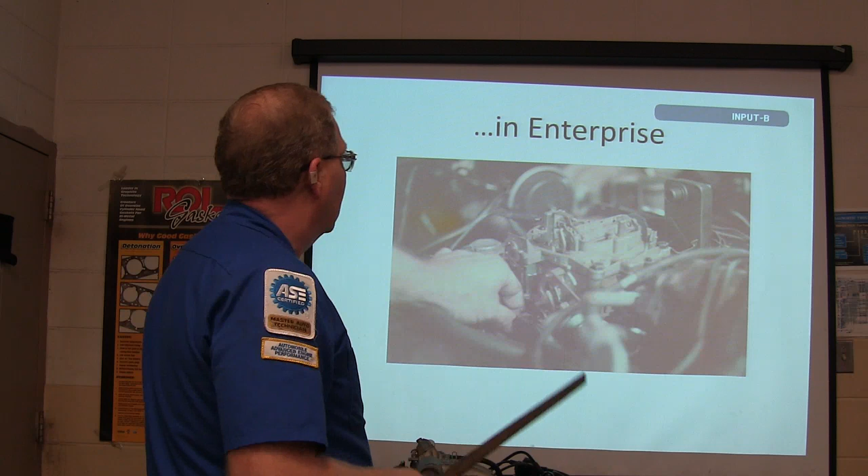In Enterprise, I went to work at a shop over there when I came back off of harvest and everything. Well, actually, when I came back off harvest, I went to college for a little while, and I was working at a gas station part-time. Gas was about 40 cents a gallon back then.

And this was working in Enterprise on carburetors and all that kind of stuff. What kind of car is that? Looks like a Chevy. How do you know? I know what a Chevy looks like. I understand that, but how do you know? How can you tell that's a Chevy by looking at it?

That's a Quadrajet carburetor. That's what I was trying to get somebody to say. What did you just say? What is that right there? Quadrajet. What is that? This picture was taken in 1977, by the way. That's a crankcase breather, right?

All right, now, did a lot of wrenching in independent shops, fleet maintenance. Fleet maintenance is pretty darn cool. That's kind of what you're doing right now, is fleet maintenance. If you maintain the equipment and keep it checked out and keep it serviced, then you don't have a whole lot of regular repair work to do. Not usually. Occasionally you have to fix something. But the better you are at keeping this fleet maintained where it'll stay smooth, then it's basically you're just oiling the machinery. And that's a good job to have, and it's also valuable to the person you work for.

I did that down in Texas. I went to school with Volkswagen in Jacksonville and Mazda in Jacksonville. Lincoln Mercury, I went to school there with them. International Harvester, I went to school with International Harvester. For a little while I worked with the International Harvester dealer. And Ford, Jeep, Chrysler, and that kind of thing. I've been to all those schools, and I don't know how many hours of factory training I've got, but I got quite a bit. Now, what got me was I'd been working on cars 6 years before I ever went to my first school.

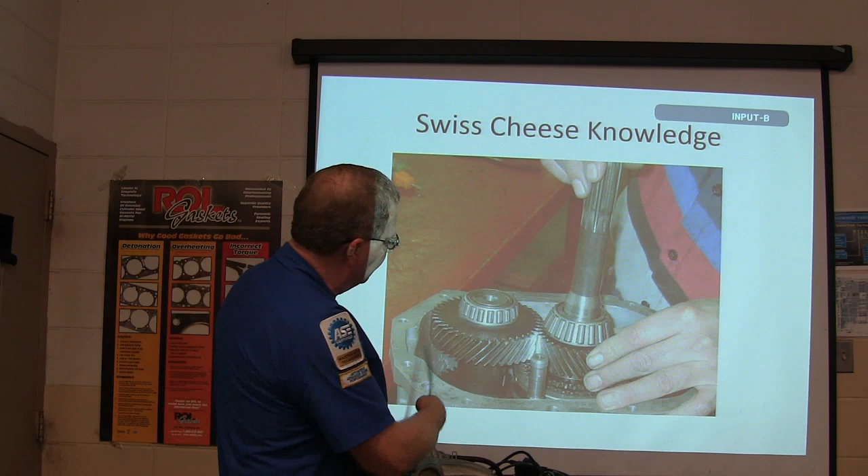But I could rebuild all manual transmissions, and I did it. But if you ask me how manual transmissions work, I couldn't tell you. I just knew I could take that thing apart, put it back together like a puzzle, and I could drive away on it. But if somebody says, well, exactly how does the power flow work? I didn't have a clue. I never saw a wiring schematic for 6 years.

Really. But I went to school with General Motors in 1981, down in Houston, a 2-day class, because we had a Delco parts supplier when I was at Sabine. I went down there. It's the first factory school I ever went to. And then after that, I went to a whole bunch more. But when I went to the Volkswagen place in 1983, I saw my first wiring schematic, and I thought, man, if I know how something's wired up, now I can fix it. I ain't going to have to guess all the way through. I've been guessing all that time. Didn't know there was a good thing like a wiring schematic I could use.

Worked in Dothan at the Ford place. Now, this wire harness here, this is my buddy Donnie. I took a picture of him. That wire harness was no longer available for that Aerostar, so he had to rip the dash out of it and cut the harness apart and fix it wire by wire. Of course, they were willing to pay him however much time it took.

That looks kind of aggravating and complicated, but when he got it all back together, it was like brand new.

This right here was me working over at the Ford place. The reason there's video of me here was because they actually had news reporters doing this, and I was training these young boys even back then.

One day a lady called me at the Ford place and said, I'm working with the TV station, and I need somebody to talk to me about oxides of nitrogen. I said, okay, what do you mean? She said she'd called all over Dothan and couldn't get anybody to talk to her about oxides of nitrogen for a news article. So I said, if you'll come over here and bring your camera crew, I'll talk to you about oxides of nitrogen. And so I did.

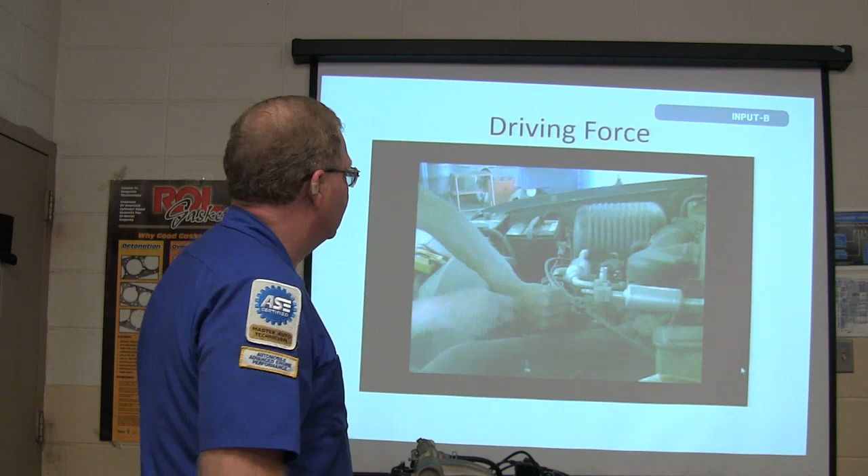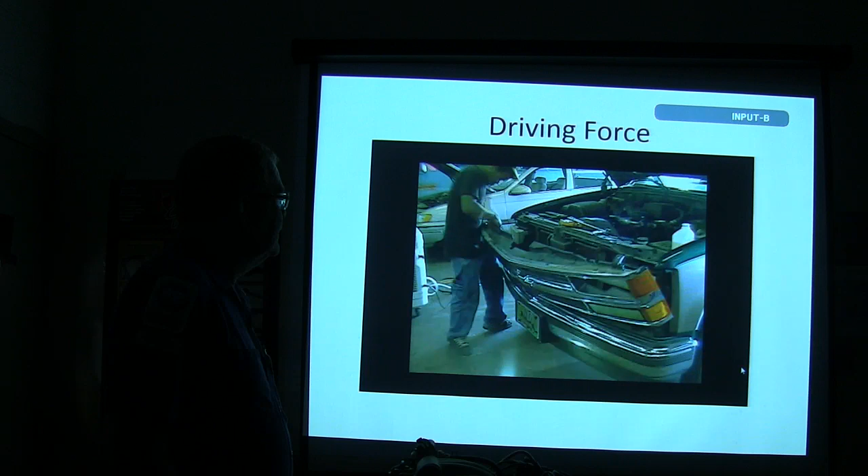I made this little video, so it's part of a recruiting video here. I like making videos.

Oh, when you do that, it's not fair. Why? You just saw it.

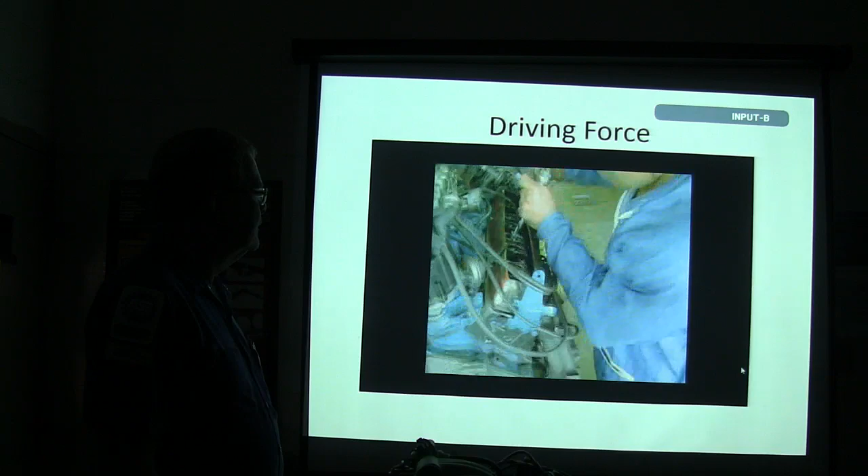She won gold at the state competition and competed at nationals and all that. She came in here not knowing anything about cars. She was a little blonde-haired, blue-eyed girl, and she just said, well, I wanted to be challenged. She hadn't even taken steering and suspension or brakes yet.

I said, get those brake trainer stands over there and work on them until you're sick of them, then work on them some more, and then I'll show you a few things about alignment. She went up there and put a whooping on everybody, because they had a vehicle jacked up with stands under it with exactly the brakes she had practiced on, and she was only one of 40 people who could put those things back together after taking them apart. It was amazing, everything just fell into place.

She could actually get her alignment angles right because she was kind of like Noah, you know how much horse sense he has and how logical he thinks. She had that kind of thought process about her. That's the motor age stuff - you guys know I've been around motor age for a long time.

This right here, this was one of the things I noticed. Everybody knew in the community where I grew up that I worked on cars. So whenever people know you know how to fix cars, they want you to work on theirs for free, because you love them, or because you love doing the work.

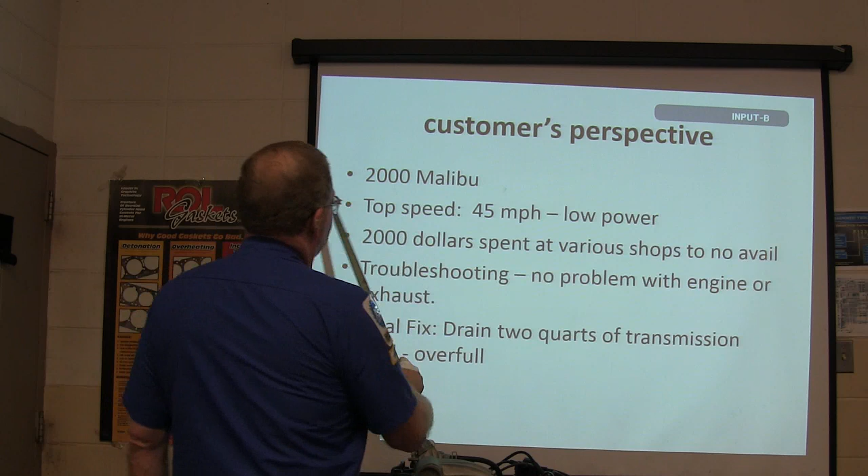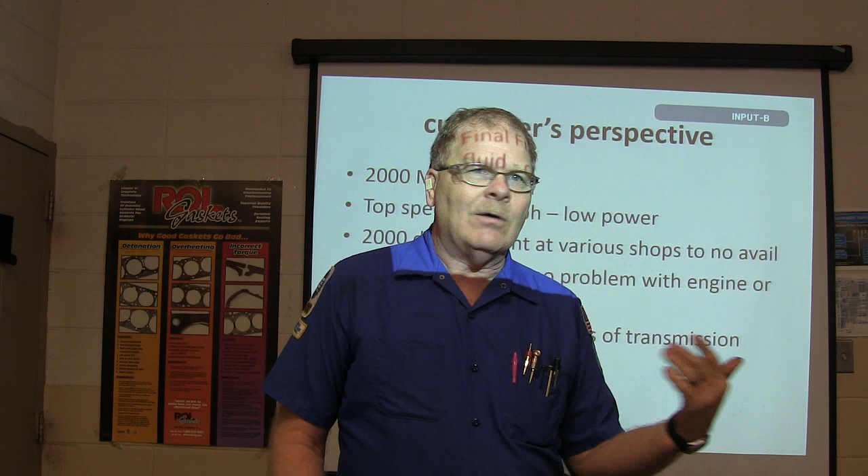2000 Malibu, top speed 45 miles an hour, low power, $2,000 spent at various shops to no avail. Troubleshooting found no problem with engine or exhaust. Final fix: drain 2 quarts of transmission fluid. That's all that was wrong with it. That particular transmission, if it's overfull of transmission fluid, chokes the car down where it won't hardly go. Usually if you overfill one, it pukes it out the vent and goes all over the place, but on that one they don't do that - I don't know why. When we drained the fluid out to where it was supposed to be... on that one there's just a little cap on top so you pour it in. A lot of people feel like too much is better than not enough, so they just dump a bunch of fluid in there, and if you get too much in, it won't hardly go.

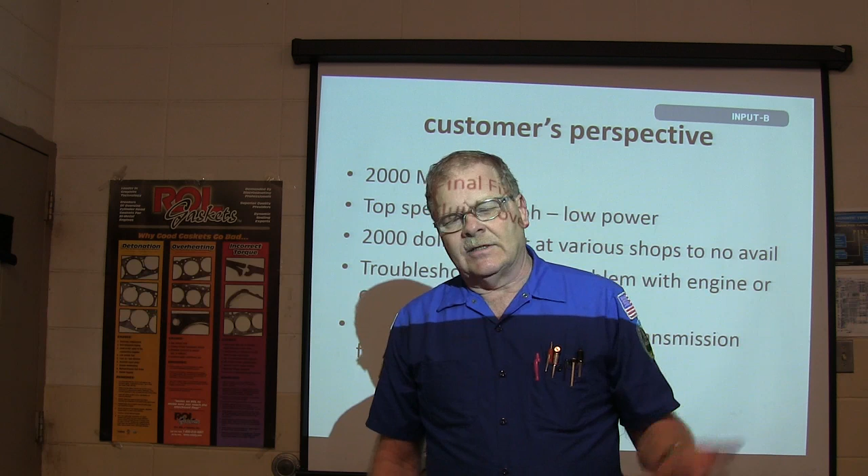My son Matt had a little car with one of those transmissions in it. He called me and said, Dad, I took my car to have the oil changed quick on the way to work, and after I got it back it wouldn't hardly go. So I told him, jack it up in your shop, or put your stands under it, and with the engine running and the transmission warm, pull this little plug out so a bunch of fluid runs out. He put a pan under it, about 2 quarts of fluid ran out. Put it back together - perfect, ran like a brand new car.

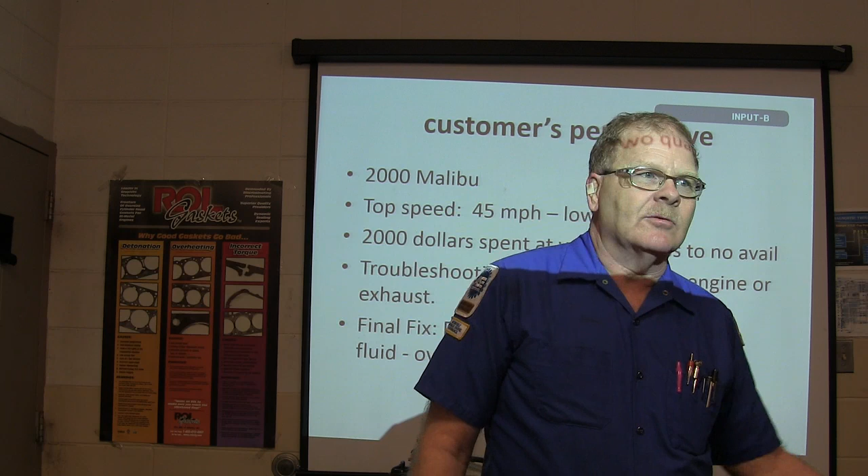So he went back and said, why did y'all pour transmission fluid in here when all you're supposed to be doing is changing the oil? They said, well, we felt like you might need some, you know. But they didn't know how to do it. Anyway, that's what the deal was on that.

Think about that - $2,000, you'll never get that money back, because everybody assumed it was a catalytic converter, or a mass airflow sensor, or low fuel pressure, something like that. I'll tell you this - we checked all that stuff, didn't find anything, stumbled across the transmission fluid problem by accident because I was teaching transmissions, and I said, hey, they need to know how to check the transmission fluid in this car. That's when all that fluid came out of there. I said, I wonder if this thing's going to run better now. And it ran like a spotted eight.

And then she paid a $5 basic charge.

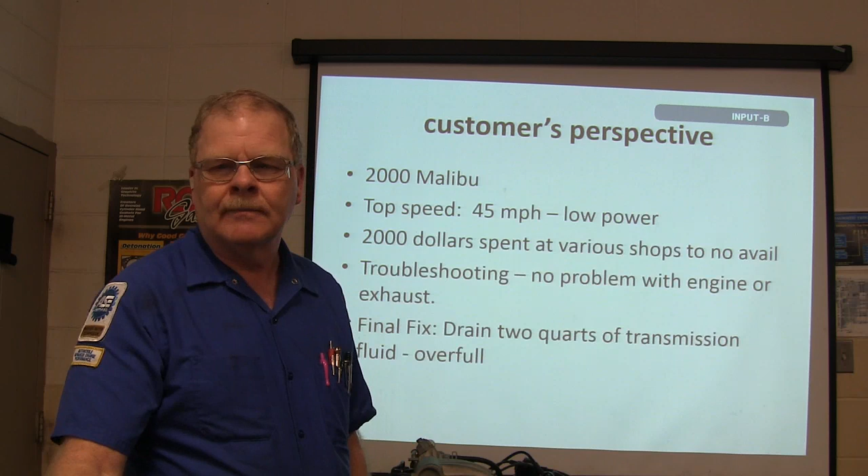It never knew you were spinning it over because that fuse had been pulled out and put in a different place. You're spinning the thing over, and it's just putting a little dab of fuel in it. It would if it was idling, but that wasn't enough to start it because you need to wet the manifold to start one. It's like when you pat the gas on with a carburetor, right? Same deal, it's going to flush the fuel in there.

I thought about this for a couple of days. I said, well, it ran just fine after it finally started, but it was really hard to start. This guy said if you spray carburetor spray in there, it'd fire up and run just fine. But all we had to do, whenever I did the wiring schematic, I looked at the fuse there and found out there was no fuse there. It wasn't like it was blown, there was just no power going to pin 20, I think it was. I plugged the fuse in there, fired right up, and good to go.

A lot of the times you'll see these shops charge somebody $400 or $500 for seeing four spark plugs in a four-cylinder. I don't know what in the world is going on there. On the Mercedes you worked on, they wanted $1,100 to put those mounts on there. I didn't get paid anything. I know, you can suck it up.

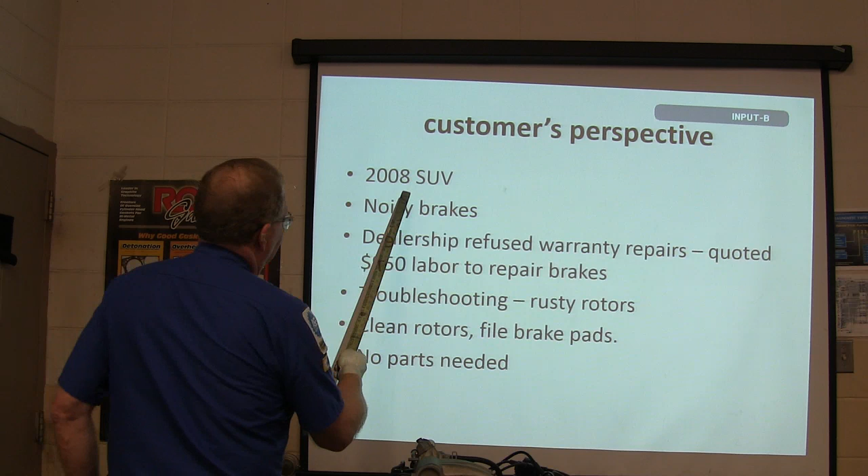All right, 2008 SUV, this was a Honda. Noisy brakes. Dealership refused warranty repairs, quoted $950 labor to repair the brakes. This was under warranty, but they said, you've been riding your brakes, you've messed them all up, we're going to rebuild all your brakes, we're going to charge you $950.

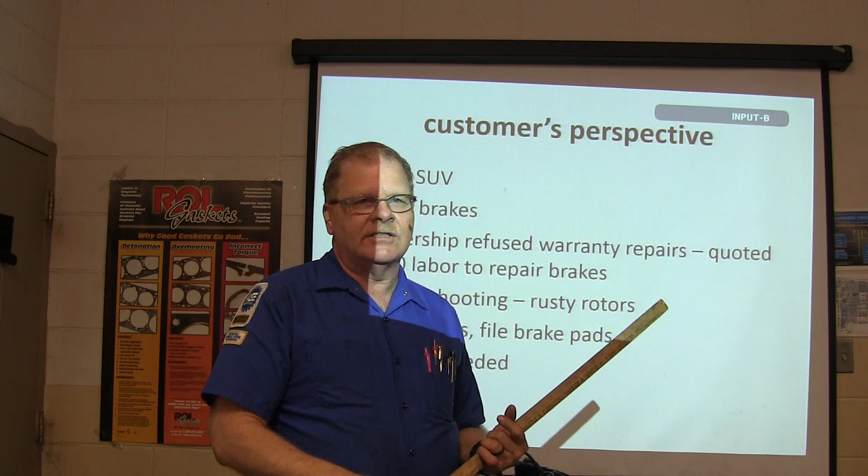His daughter happened to be in this program at the time, so she brought the vehicle over here. Rusty rotors - one of his daughters had been overseas for a while because she was in the Navy, and the vehicle was just sitting there until the rotors got rusty. And you know when you drive on rusty rotors, that goes away. That's how my little Honda was on that one side, I just ride with it and clean it out with the brakes, keep on going. Cleaned the rotors, filed brake pads, no parts needed.

I mean, the brakes weren't worn out, they had plenty of pads. The rotors didn't even need to be machined.

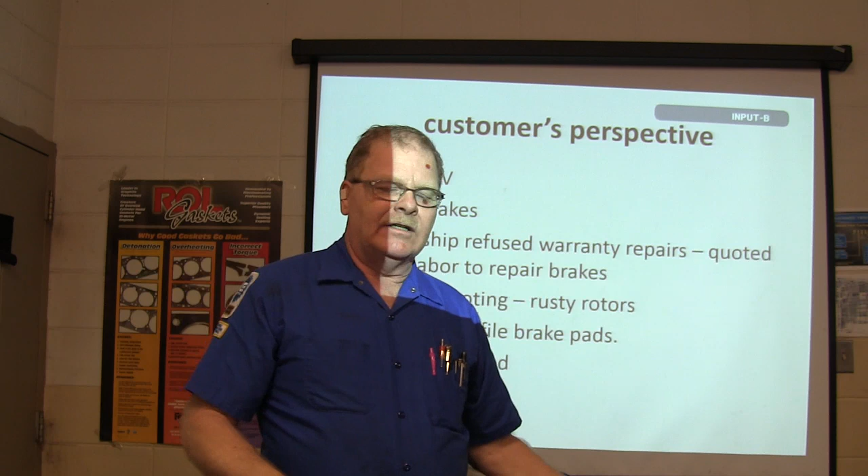One time when I was at the Mazda place, this woman had run through a puddle, apparently, brand new Mazda GLC, this was in '83 I guess. She had stopped the car and parked it and left it there a while, and it had been there with that water trapped between the rotor and the pad long enough to make a rusty patch where that pad was. And it locked that wheel up. Whenever she would stop, it would go 'oh,' every time, and she wanted that looked at. So she brought it in there.

When I pulled it apart, I said, well, ain't really a lot wrong, this rust should be gone. So I put it in neutral, got my air drill, put a big socket on the CV joint nut, spun it up, you know, 2,000 to 3,000 RPM, holding some 80 grit sandpaper up against it, cleaned it off and everything. Cleaned the pads off, put it back together, and it stopped just as good.

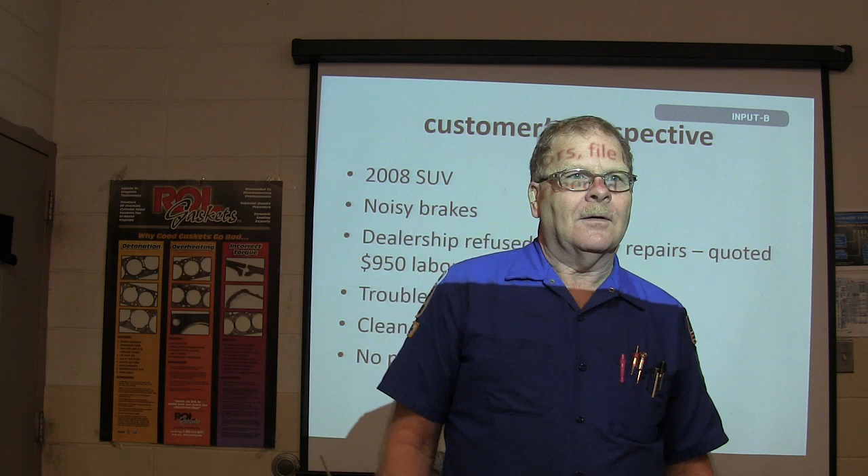The service manager came over there - I was at the Mazda Volkswagen place at the time. He came on, 'what in the man are you doing?' I said, well, I'm trying to fix this lady's car without putting brand new rotors on and everything. Well, you sure ain't making us no money. Anyway, she wound up paying $20. She was so happy, she came back to us every time she needed some work after that.

Just because you go to the dealership doesn't mean you're going to get ripped off, at least not if I'm working on it, you know what I'm saying? I tried to make sure.

This farmer one time came to the Ford place. He handed a blank check to the cashier with his signature on it. My truck's skipping and I want it fixed. Would you do that going to a dealership? No. Well, you know what happened? I put one spark plug wire on it.

All it needed was one plug wire. At a Ford place, you can get just one spark plug wire. It used to be like at the parts store, but they don't sell you a whole set anymore. I put one plug wire on it, and the bill was like 20, 25 bucks, something like that.

But this guy trusts us that much, we don't want to betray that trust by having a big, huge bill, like hey, we can just do whatever. Always remember that. You want to be the one that everybody trusts, and they'll ask for you, saying I want her, I want him, I want this person to work on it. I want the person that can stick with it with the hacksaw until the piece falls off.

Good Lord. Well, she was blonde, but what they didn't recognize was she wasn't a dumb blonde. She bought the part, and they said, well, we'll give you a discount on the labor if you'll let us put it in. She said, I don't think so. So she brought it over here.

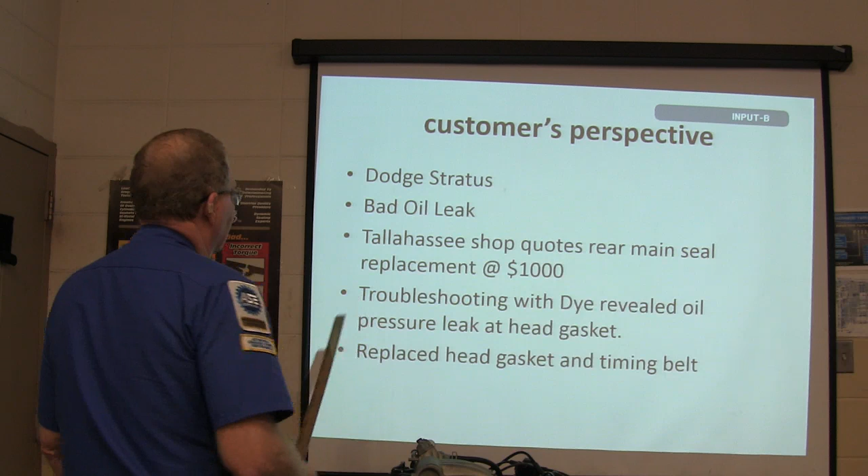Dodge Stratus, bad oil leak. Tallahassee shop quotes rear main seal replacement at $1,000. Troubleshooting with dye revealed an oil pressure leak at the head gasket. Replaced the head gasket and timing belt. Now that was a pretty good bit of work, but the rear main seal wasn't what was leaking. Learn from that: just because it's dripping off the bell housing doesn't mean the rear main seal is leaking. You need to find out where it's actually leaking from.

Remember that old '76 GMC Sprint that was leaking from the back, but it was actually coming from up high? Somebody was telling me the other day, you know how these Chevys have that little round cover on the bottom of the bell housing that pops out so you can turn the torque converter to line up the bolts? Not so much the older ones, but the newer ones. This guy says, I got a whole bunch of oil inside of there. Well, where do you think that's coming from? If it's motor oil puddled up inside the housing, that's typically going to be the rear main seal, isn't it? You got that?

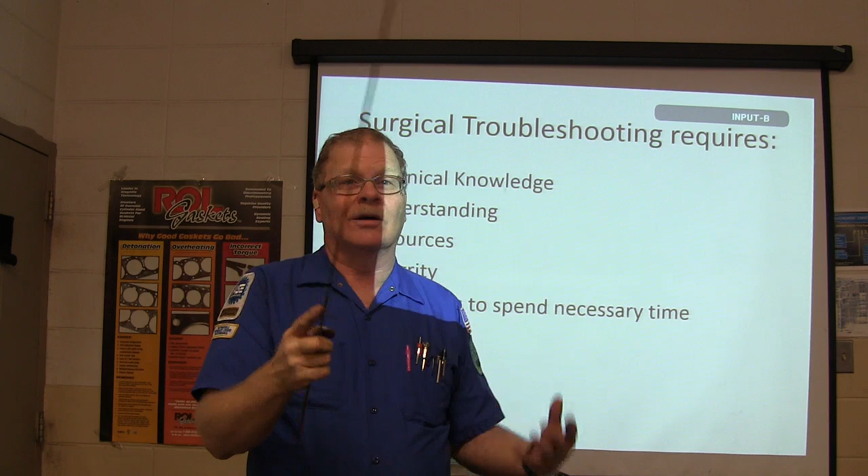You ever have to work without a shop manual over there? Oh, God, yes. Isn't that aggravating? Yeah. So you're having to actually work without one, I mean they just want you to wing it, don't they? Yeah. And do you wing it? The best I can, if I have to, yeah. Now you're pretty good at that, aren't you? Yeah, that's what happens when you work for the city.

Integrity, that's the guy you can trust to do what's right when nobody's going to know the difference. You ever heard anybody say hygiene is being clean when company's not expected? That means you're being clean when nobody's even going to be around - you're still going to be clean. That's basically with your work.

Do you work really hard to put that last bolt back in, or do you say nobody's really going to know if I put this last bolt back in, so I'll just throw it on the bench and not worry about it? No, but I have put things back together and had to make bolts work. Have you ever done that too? A handful of extra bolts when you put the dash back in. Like, I don't know where these go, but it ain't rattling, so I guess it'll be alright. You know what I'm saying? I had the same thing.

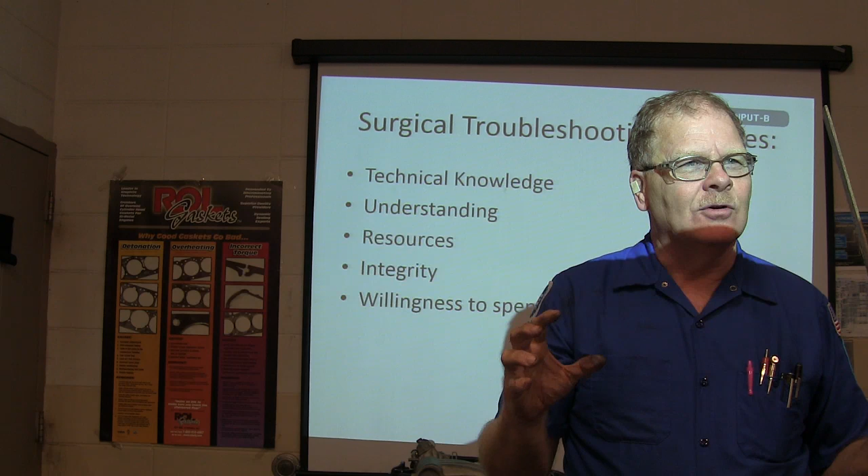What you need to do is take a bunch of little snack bags, and every time you're taking a bolt from a certain area on a Ford Probe - whenever I was working on this Ford Probe, taking the dash out to get in behind the speedometer to work on the speed sensor on one of those early 90s Ford Probes, I had to take out 33 screws to get the dash out. I counted them one day - 33 screws had to come out, and every one of them needed to go right back where they were.

One time I was putting the instrument cluster back in - you might notice on some of these Ford vehicles the instrument cluster's got these little things sticking out with a little rubber cap, almost like a vacuum cap, so that when it snaps in there it won't rattle. One of those things came off, and this soldier guy who was in the Army was sitting there leaning in, watching me put the truck back together.

He said - and I was already just about done with it - and I said, what's that vacuum cap looking thing laying there? I said, oh, that came off the back of this instrument cluster. I said, I'm gonna go ahead and put that in the cup holder - if you hear a squeak or rattle, that'll be the reason for it. But I ain't tearing it back down to put that back in there. Well, he was going to Alaska anyway.

One day these guys stopped by, on a trip with their wives, and said when I go to start my car, the clock resets. They call me out in the ride-up area. I said, oh, you got a weak battery - when you go to start it, it goes below the threshold and resets the clock. They said, oh well, I'm glad I found it here, let's go put my battery in. I said, no, we don't do batteries here, you got to go on down the road. I went ahead and put him a battery in, but the guy that was with him thought it was really funny. Hey, he got you.

More cars in the U.S. than licensed drivers, even after the cash for clunkers purge. Remember that? Several years ago the government put money into it - trade in your gas guzzler and we'll give you $4,500 or $5,000. You wouldn't believe how many 03, 04, 05 Expeditions and Suburbans people were trading in because they knew they could get it. They were supposed to run the engine and lock it up so it could never be driven again. That didn't go very far - they ran out of money real fast and decided it was a bad idea.

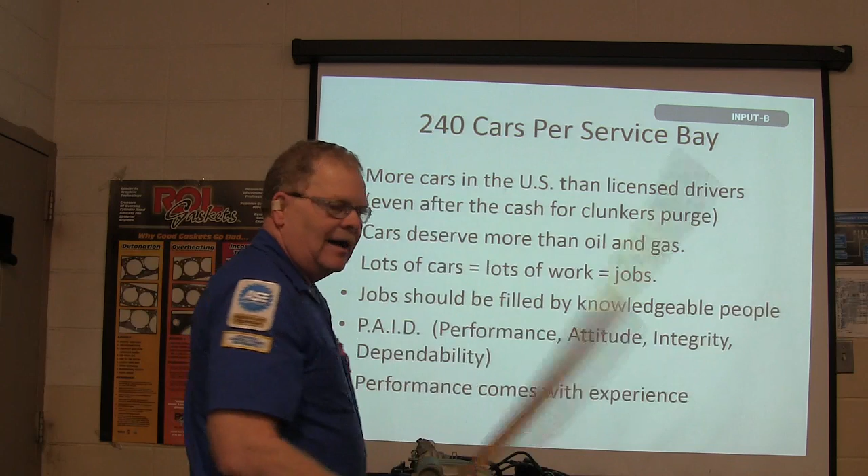Cars deserve more than oil and gas - a lot of cars, a lot of work, a lot of jobs. I got 3 or 4 calls last week from shops needing help. There's work to be done out there and places needing help. Jobs should be filled by knowledgeable people who can do the work, who don't mind going to work every day, showing up on time, getting the work done, putting in your time - not slouching off, leaving early, dragging in late, or not showing up.

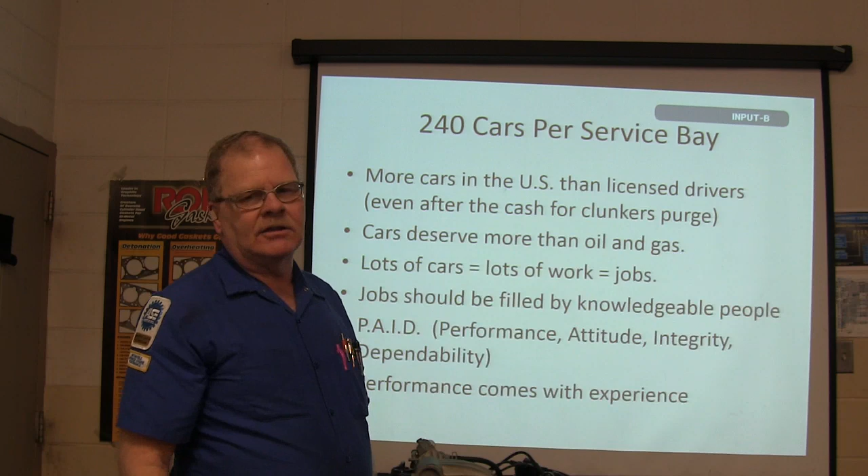Performance, attitude, integrity, and dependability - that's how you get paid, and performance comes with experience. The speed will come. It's a good idea to do the job as fast as you can, but don't do it so fast that you leave stuff loose.

Sometimes it's a really bad idea - over there they like to just run it up with the impact wrench and all that. That's fine, but when we went to pull that other wheel off Randy's car, one of those lug nuts did the same darn thing on the other side, where the nut wouldn't come off. Same car, same darn car - we knew it was an accident, and it was wacky as all get out. We had to work to get that out of there. A lot of times when you run those things up with the impact wrench, you start to destroy the threads a little bit, and then it's welded to itself. I don't know why we see so many of those here. Imagine somebody trying to fix that beside the road - you can't get that.

Good technicians are not wimps or crybabies. Got any wimps or crybabies in here? All right, two hands went up.